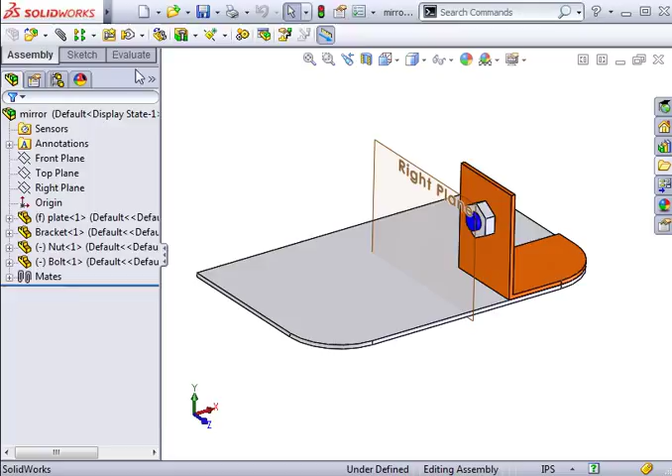I'll begin by launching the Mirror Components tool from the Assembly toolbar. This is the Mirror Components Property Manager. The first selection box is asking me to specify the mirror plane. I'll select the right reference plane, but keep in mind, you don't have to use one of the 3 default reference planes. You could use any plane or flat face in the assembly.

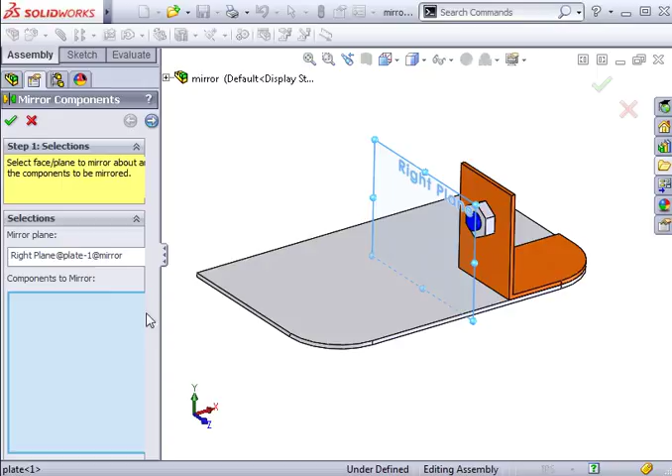Next, SOLIDWORKS asks me which components I'd like to mirror. I'll select the bracket, nut, and bolt in the graphics area, and you can see they've been added to the list in the Property Manager. I'll click the next arrow to move on.

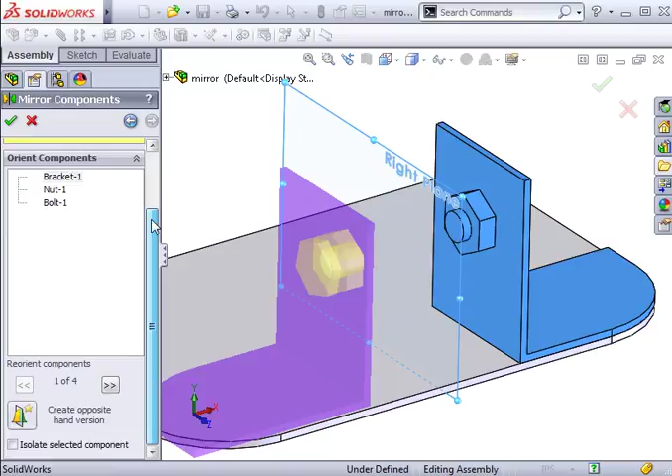The next step here is to orient the mirrored components. You can see from the preview in the graphics area, if I were to simply click the green check and finish the command now, the bracket would not be properly aligned with the plate.

To orient a component, I'll first highlight it in the selection box, and then use the arrows to toggle through the different orientations. You can see from the preview that none of these possible orientations correctly aligns the bracket with the plate. This is because we need to create an opposite hand version of the bracket.

To do this, I'll click the Create Opposite Hand Version icon. When I do, you can see the preview update, and the bracket is now properly aligned. Also, notice that a mirror icon appears next to the bracket in the Property Manager, indicating that I'm creating an opposite hand version for this part.

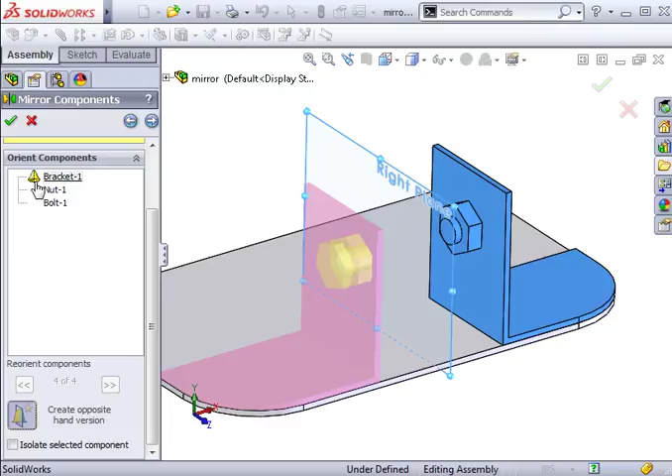I'll quickly make sure that the nut and bolt are oriented the way I'd like, and then click the next arrow. Here in this final step, SOLIDWORKS is asking how we'd like to store the opposite hand version of the bracket. There are 2 options.

We can either create a derived configuration that's stored with our original bracket file, or create a new part file for the mirrored bracket. If you choose to create a new part file, you can either add a prefix or suffix to the current part name, or give the new part a custom name. You can also choose whether you'd like the new part file to be saved in the same folder as the original file by enabling the Place Files in One Folder checkbox.

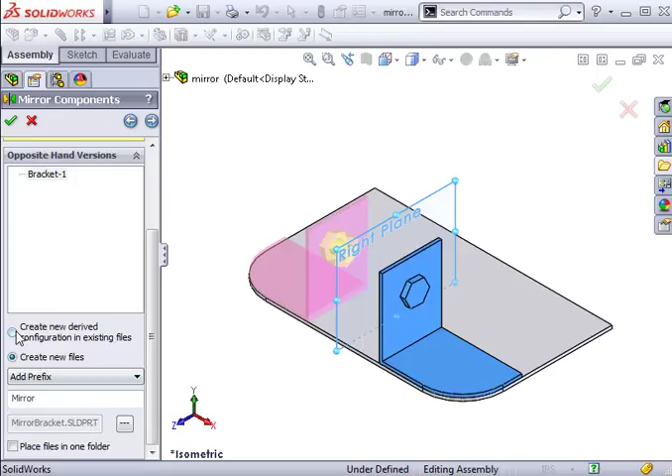Instead of creating a new file, I'll choose the Derived Configuration option and click the green check to finish the mirror command. Notice that a mirror component icon now appears in the FeatureManager design tree.

If you need to make any changes to the orientation of the mirrored components, or add additional components to the mirror feature, you can do this by clicking on the Mirror Component icon and selecting Edit Feature. The Mirror Component tool also maintains the position of the mirrored components, as well as mirroring any mates.

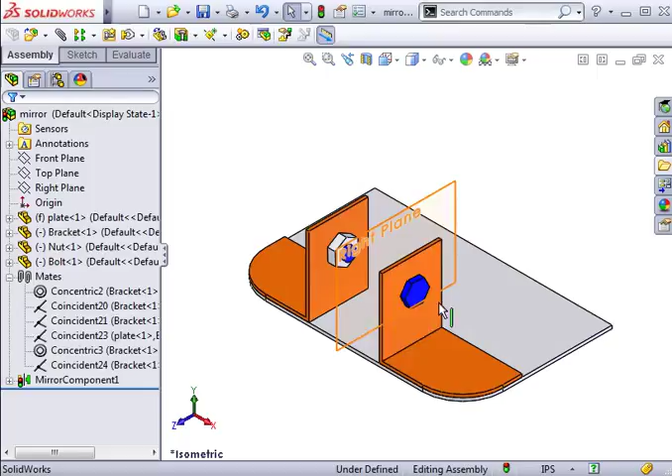Notice if I delete one of the mates used to position the original bracket, when I move the bracket, its mirrored component repositions as well.

Also, if I open the bracket by itself and switch to the Configuration Manager tree, you can see that the mirrored configuration has been created and added to the bracket part.